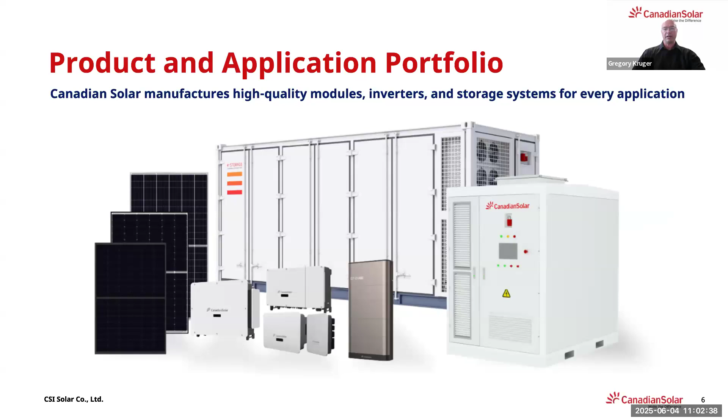Our product and application portfolio — I'm going to discuss some of our modules and then also the power electronics equipment. So we don't only manufacture modules, we also manufacture power electronic equipment for residential, commercial, and utility scale. Being able to offer this to our clients simplifies your procurement as well as any contract signing and credit processes, and it's also easy to coordinate your logistics, working everything with just one company.

Under our product portfolio, we've got the residential products, which is the panels, and then also our EP Cube, which is a 7.6 kilowatt hybrid inverter with 5 kilowatt hour battery bank, which is stackable. Then under our CNI, we've got the CNI panels with our string inverters, and then our Kubank, which is a 100 kilowatt PCS inverter with 247 kilowatt hour battery bank.

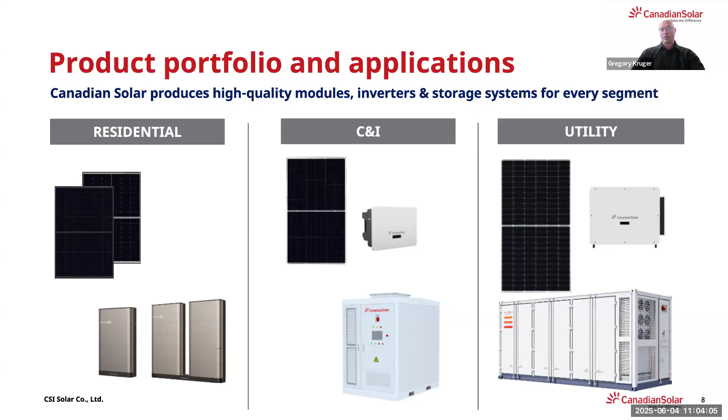So all in one unit — some of the key technical features: it's got active cell balancing, liquid cooling, and fire suppression built in. Then over to the utilities side, we've got utility modules, string inverters, and our SolBank, which is a 5 megawatt hour containerized system in a 20-foot container. For more information on these products, please feel free to contact us and we can discuss it further for any of your project requirements.

So today I'm just going to discuss our modules and the string inverters, as this is something that Nicolas is going to use during the design. Under the modules, we've got residential and commercial modules: the CS6.2-48TD, the 54TM, and the 66TM. This is a range from 440 watt up to 635 watt. All of these modules come with our N-type TOPCon technology.

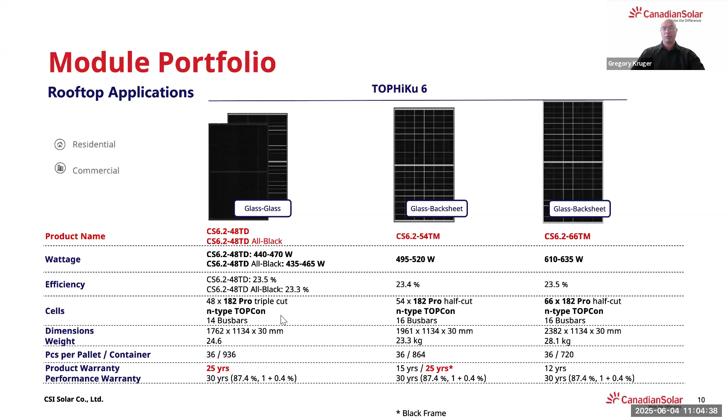Then under our CNI and utility applications, we've got the CS6.2-66TB up to the CS7N TB-AG bifacial module. Again, these are with our N-type TOPCon technology and our glass modules, the solution for your commercial and utility projects. Over to our special modules.

As you can see, the module definition is the same, except here at the end where we've got the H1, HP, and AG options, also from 620 up to 730 watts. So what makes these different is that the H1 panel is for high loads — we've increased the frame size from 30 to 35 millimeters. Under the HP, again the same dimension or thickness on the frame, but the glass is 2.5 millimeter, so that gives you greater hail resistance. And then on the AG module, again the 35 millimeter frame for higher loads.

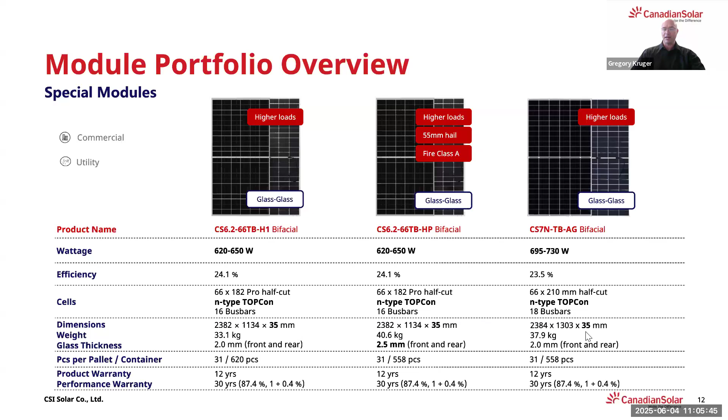So under our inverter solution, we've got a range of string inverters for your small commercial scale up to your large utility scale. These inverters feature MPPTs that have a 32 amp or 40 amp input, and they have a 10-year standard warranty which you can increase to 20 years. The reason we can do that is due to our patented cooling technology, which gives you long-term reliability on the inverters.

So the inverters start off at a 15 kilowatt all the way up to our 350 kilowatt. This range here for your utility scale, you'll see is an 800 volt medium voltage inverter, where the rest are all low voltage, 400 volts.

Something I want to draw to your attention, as mentioned in the previous slide, the 32 and 40 amp options. We've got inverters with 9 MPPTs at 32 amps, so that's 2 strings per MPPT with a maximum of 16 amps per string. If you use panels with a larger current, we've got an option of a 6 MPPT inverter with 40 amps per MPPT, so that's 20 amps per string.

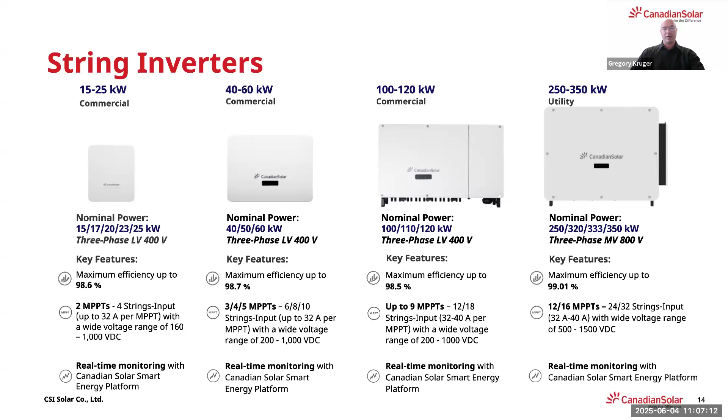For any information you need on these inverters, please feel free to contact us, and also our Canadian Solar technical support. We offer support to customers, installers, and distributors. There are 4 ways of contacting us. We also offer local pre-sales and after-sales support, installation support, and on-site maintenance and support. This way we try to offer our clients the best support on our Canadian products.

So that's everything from my side for now. I'm going to hand you over to Nicolas, who will do a demonstration on the design tool.

Thank you, Greg, for a great introduction. Quickly introduce myself, I'm Nicolas Garcia, technical support engineer for system design here at Canadian Solar. As anticipated by Greg, we are going to do a demonstration of our design tool. I'm just going to share my screen here.

We will focus here today on a C&I project with our modules and our inverters. Our tool is free, everyone can use it, you just have to register. We will share the link.

It's here provided by Insan, and this is the login window. Obviously I already have my credentials, so I will just log in.

You will see now how the tool is structured in 2 parts, maybe. The main part, plant configurator, or if you go here to home, it's basically the main window of the tool, a part of the tool where you can design projects from scratch, including also the physical part, so all the buildings, obstacles, and so on.

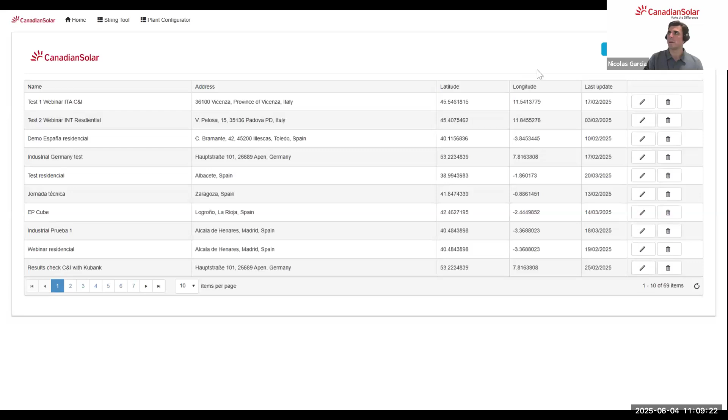As mentioned, I'm going to start here today with the string tool for a C&I project with modules and inverters. To create a project, we go to string tool and click on new, and then we just have to input some basic data. So for example, here, webinar 4th of June will be the name of the project, then the reference as we want, and a short description, which is going to be for me, PV with inverters.

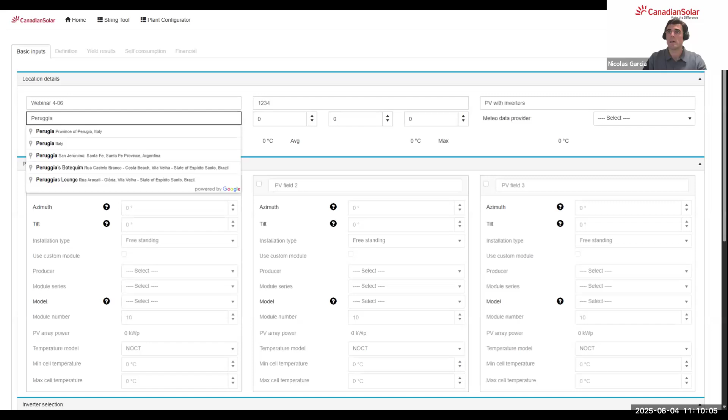Very easily - the important thing here is the address. In this case, I'm just going to input a city. If you have the exact address, it's always better, because then the system is going to load data from Meteonorm or from PVGIS. It's going to input all the relevant information on the radiation, on the temperatures, and so on.

Also important to mention that all data here that is loaded into Insan is verified and certified by the Fraunhofer Institute in Germany, and it's even bankable. So here we've seen how the information has been loaded from the location, temperatures, and so on, and we can move to the next step.

In the next step, we have to define PV fields. In this case, we can define up to 3 PV fields. We just have to input the information here and activate as many as we want. I'm just going to use 2 here, just to show you how it looks like in the next step. But basically what we have to do is include an azimuth here by clicking on the question mark or inputting the number directly in the window.

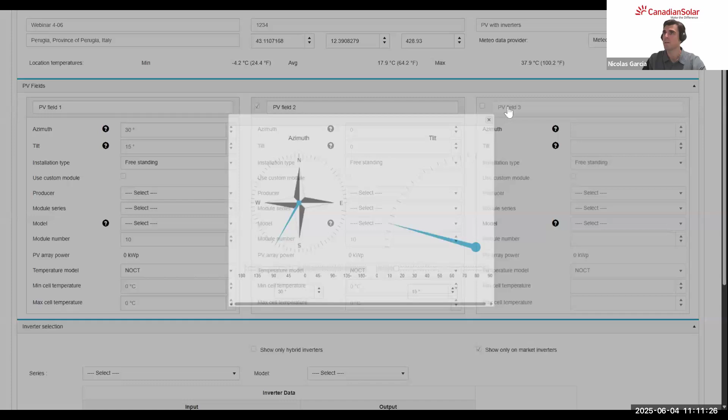Here I'm going to say that it's a south-facing slope, more or less, and then the tilt is going to be almost 15 degrees, which I'll input by hand. Once we have it, we have to select if it's a freestanding installation or roof mounted, and then we can choose the module. If we want to choose a custom module that's not Canadian, we offer this possibility here even by clicking on this box.

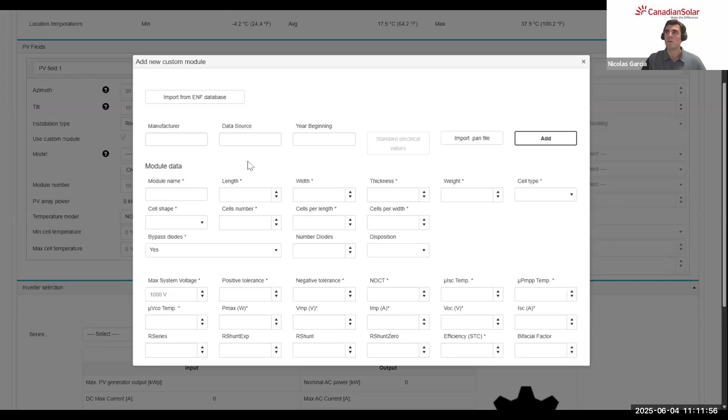To create a new module, we just have to input the data here manually, or select some modules that we have created in the past. We can input also a PAN file directly, or we can look into the ENF database and fill automatically all the fields.

Here we are going to recommend using a Canadian solar module. In this case, for a commercial and industrial project, we are going to use the CS6.2-66TB of 630 watt power class. I'm going to select here the number of modules to get exactly 180 modules for 113.4 kilowatt peak. With this, we have defined the first field.

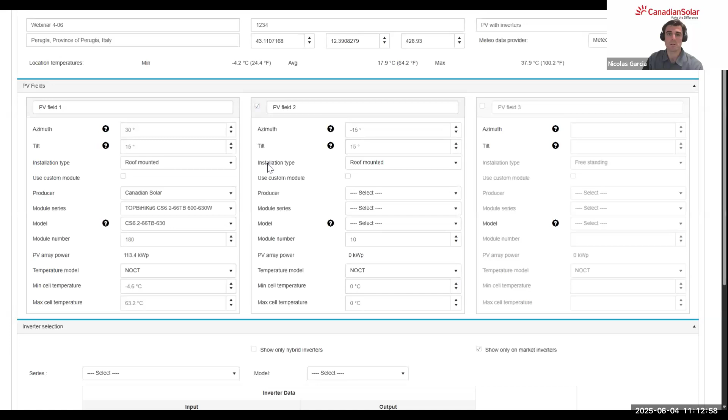Then we have to fill the second one. I'm just going to do something similar here, similar tilt, 15 degrees, just to show you how it looks in the next step. Obviously, the demonstration we are doing here is something invented, not real, but just to show you all the features of the app.

Again, I'm just going to be fast here, selecting the modules, 630 watt, and I'm going to say, maybe 189, just so we can differentiate them. With this, we have defined the PV fields.

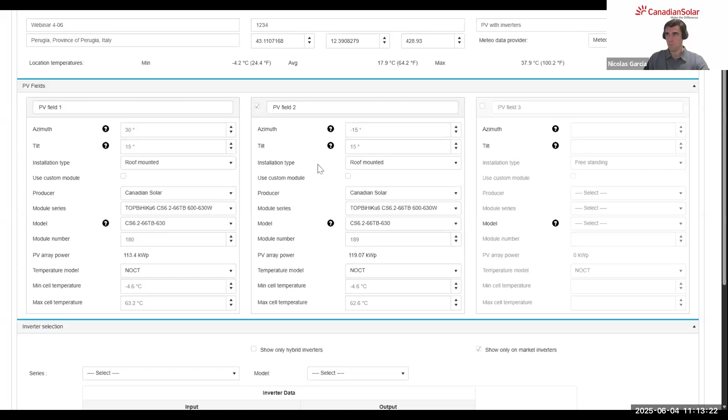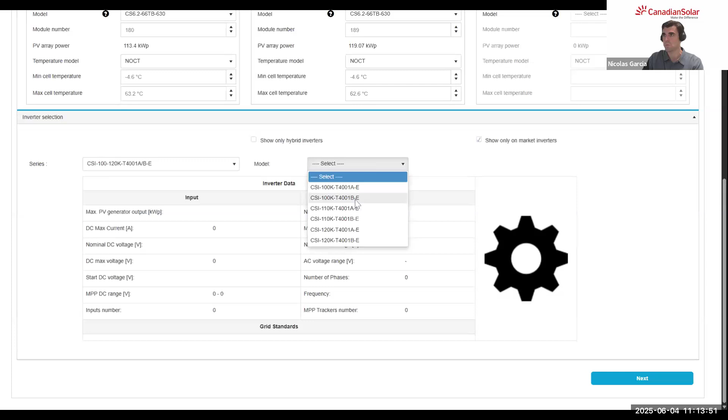We just have to select now the inverter. For this, we go into the inverter series. Here we have already marked a box that shows only the inverters that we have available, and you see how we have all our commercial and industrial inverters. Also the EP Cube, it's not going to be covered in this webinar, but in this case we're going to choose the 100 to 120 kilowatt series, and focus maybe on the 100 kilowatt inverter type B, with 9 MPPTs.

Here we have some basic input data and also some output data that we can use to estimate the one that we have to use. Once we have it, we click on next.

And we move into the inverter configuration. The system will allow us to change the number of inverters here in the beginning. Here we will have 2 inverters with a DC-AC ratio of 1.1 more or less. We can just confirm, and here we will see the layout.

We have here the inverter number 1. I'm clicking here just to hide it. And then we see the inverter number 2. Also, we can hide it.

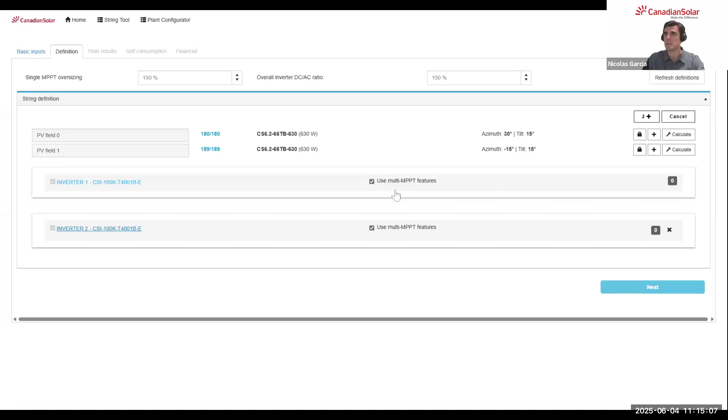Important here is that we assign, well, here we have all the MPPTs. In this case, we have 9 MPPTs, and we have here the PV field that is going to be assigned to this MPPT. In this case, the PV field 0 is going to go into inverter number 1. And if we go to the second inverter, we see how it's already assigned the PV field 1. This is important to balance the strings.

Then on the layout here, we've already defined the PV fields with the number of modules that we have, 180 and 189, the module that we choose, also the azimuth and tilt. Then we have on the inverters all the MPPTs.

Important here to know what this means basically. Here, for each MPPT, we have two entries. So on the rows, we have entry number 1 and entry number 2. And then on the columns, we have the number of modules that are going to be inputted into each input, so the number of modules per string.

What this tells us here is that the minimum modules per string that has been calculated for this inverter and these modules is going to be 6. So if I click here on the 6, it means that we are just inputting one string of 6 modules into the first entry of the MPPT. If I click on the 10, then it's going to be one string of 10, 14, and so on.

If we are going to use both entries of the MPPT, then we have to go into the second row and click on these cells. For example, here, when we see 12, it means that we are creating 2 strings of 6 modules, inputting 6 on the first entry and 6 on the second entry. Same, if we click 10, then we have 2 strings of 10, 20 total.

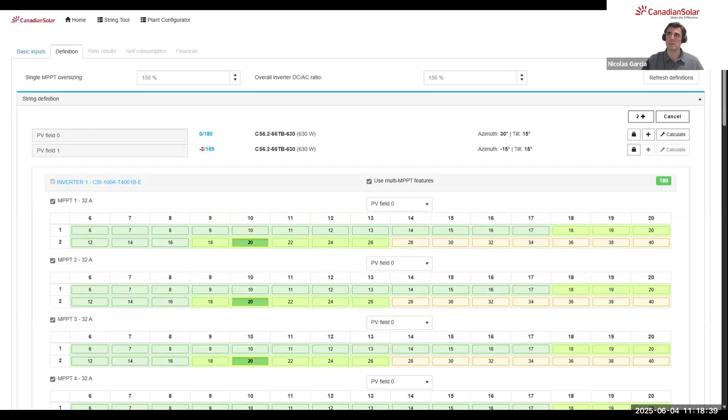And there we go. Here the system will tell us if we have assigned all the modules or not. So for example, this -3 seems that we have assigned 3 modules more than we are supposed to. So we just have to assign this correctly, or just click calculate again, and the system will do it for us automatically.

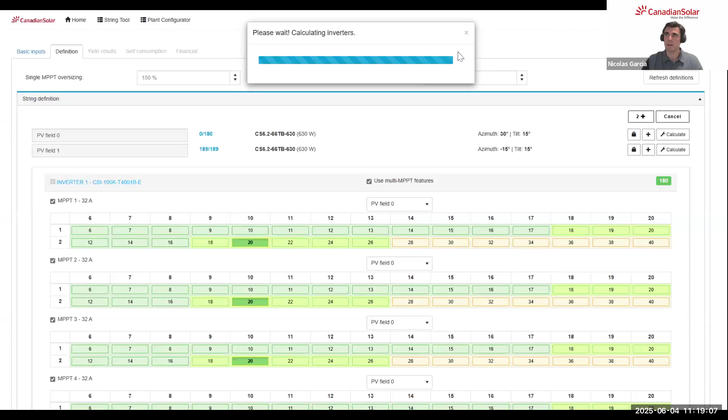Again, we generally recommend doing it by hand because of the instructions of the inverter. Yeah, exactly, now we've got one module left. I'll just do 19 here, very randomly, until we have 0 out of 189 to assign.

Very quickly, I'll just go to the next step.

Here again, the system will load the data that we are inputting together with the data that it has from Meteonorm for irradiation, also looking into the physical landscape that we have on the location that we selected, and it will load it kind of in layers in order to get an output that is reliable and that we can then export into the final report that we can share with anyone, with the client, or also just for us to do our calculations. Also to mention that anytime you need any kind of support, or if you want anything tailored, just please reach out to us.

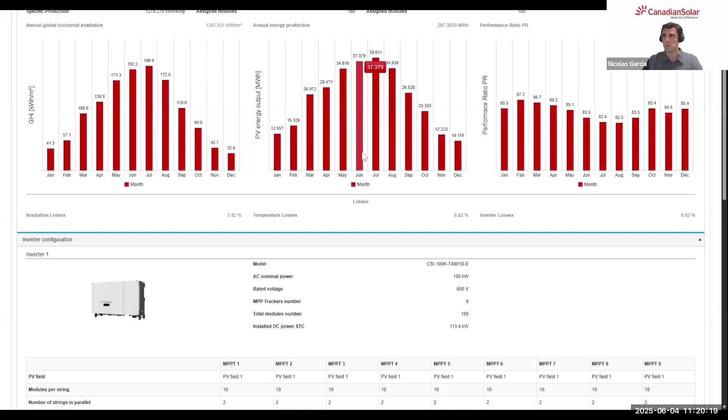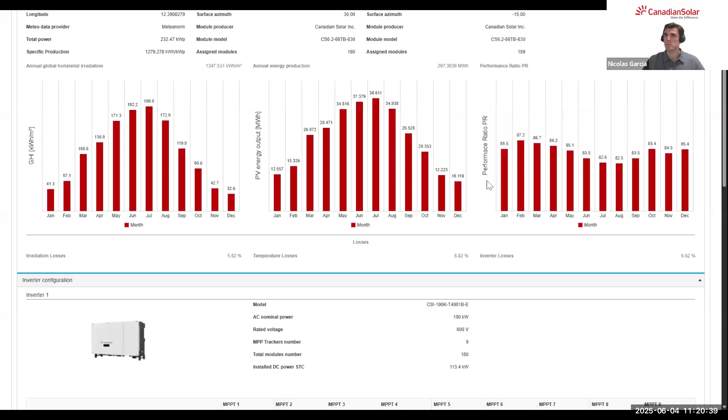We can do it together. Also, so here in the yield results, the next step is showing the basic results of the simulation, which includes the definition of the fields, kind of an estimation of the PV energy output, the performance ratio, and so on, together with the configurations of the inverters, where it shows the strings that we have inputted per MPPT here in the columns, and all relevant values of power, voltages, and currents.

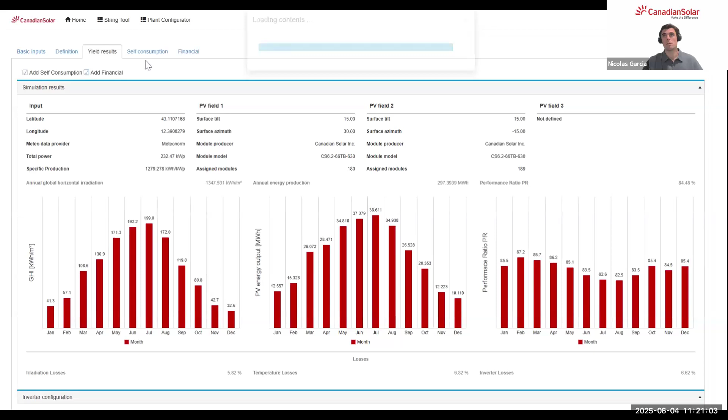If we want, we can already export this by clicking here on the top right into the print button, or we can add the self-consumption model, for example, if it's an industry, and also the financial study for the client.

In the self-consumption, what we can do here is input the consumption of the client, and then the system is going to use the algorithm to divide in a smart way the energy that's going to be produced into the self-consumption of the client or the storage system. If we include it, we will have a dedicated webinar, as mentioned, later on, and also it will be injected into the grid. In this case, first we have to define the consumption profile.

For residential installations, the system can actually calculate it with some input data. For commercial and industrial, we obviously recommend uploading the load hourly profile.

To do this, we just have to load a CSV file with one column with 8,760 values. I have here several loads. In this case, I'm just going to upload this profile with 150 megawatt hours per year.

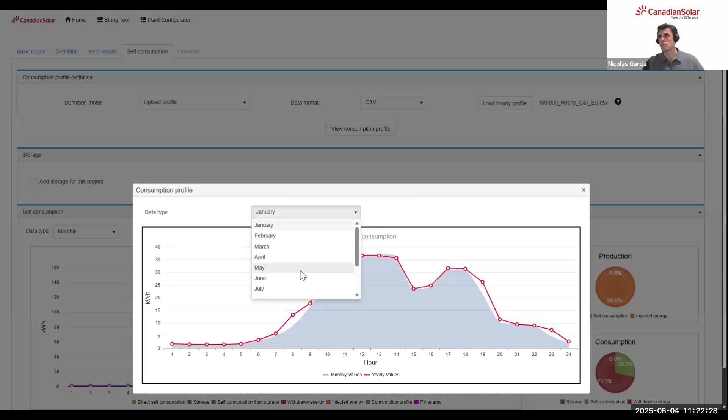We can click here and view the consumption profile, and you can see here how the consumption is divided by hour and by month. In January it's going to be different from March, and so on. Once we upload everything, the system will always tell us to reload the graph so we can visualize the results.

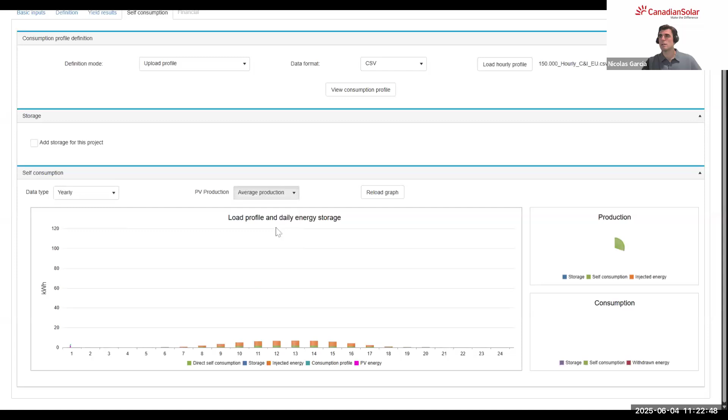So, for example, here we can see it on a monthly basis, on a yearly basis. Normally, I would recommend going to the yearly data type and seeing the average production. So this is showing us kind of an average day during the whole year, not per month, but the whole year of the production that we have here in this pink color.

Also the consumption, so the load curve that we have here in this light blue, and then where the energy is going. We can see also this on the right, where the production is going to self-consumption, 30% of it, and then to be injected into the grid, almost 70% of it.

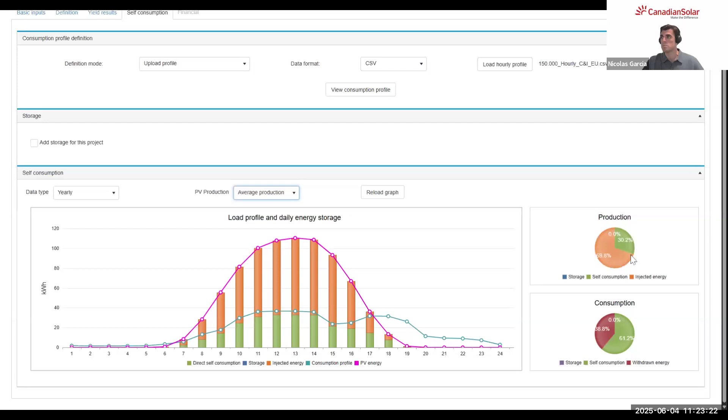If we want to add storage, we will see this later on, but just to give you a snapshot of it, we have to click on this box. And then you will see a recommended batteries capacity. You can choose our solution. In this case, it will be Canadian Solar AC coupled KuBank, and then we'll have to reload the graph.

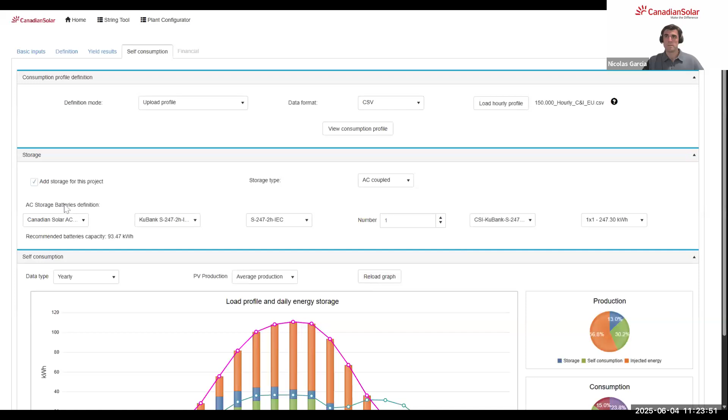This will tell us that the excess will go into the KuBank and so on. I'm not going to deep dive into this today, just going to focus on modules and inverters.

Once we have this, we just have to save, and we can move on to the financial study for the end customer to see how the business case looks. This is loading the context of the inputs we've provided, and when it's ready, we can move on to the financial part.

Also worth mentioning, this is a web-based application, so it's always better to have a good connection to work with it. We see here the financial calculation very quickly. First we've got the option to change the years of economical analysis.

In this case, it's 20. We can move up and down, but I'm just going to leave it like this. We can also change the currency; I'm just going to leave it in euros.

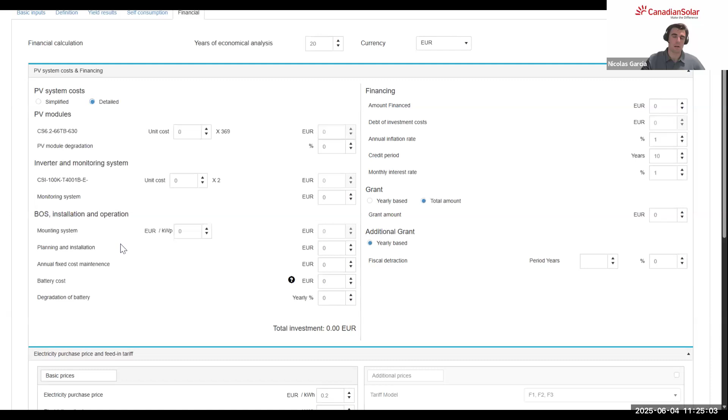First things we have to input are the costs. We can input these in a detailed way, including the cost per product, so modules and inverters, and then additional costs like installation and so on. But generally I would recommend using a total cost of the system in euros per kilowatt peak.

I'm just going to invent something here. Please don't take this as a reference, just so you can see how the system works.

The annual power degradation of the PV module we can see in the datasheet. Normally it's filled automatically, so in this case it's going to be 0.5% per year. And then the battery cost in this case does not apply.

So we will see down here the total investment needed for this project. Then, if the client wants to finance part of the system with credit, or if there are any grants available in the country or region you're working in, you can input the amount here.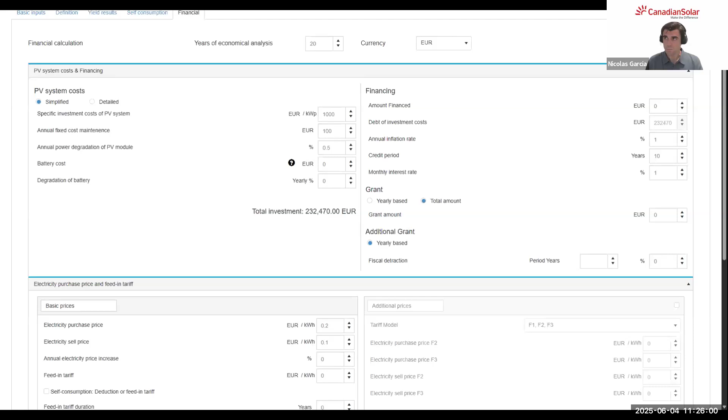It can be a total amount, so for example 10% of the project, or a fiscal detraction of an X% for a number of years. I'm just going to leave it blank, and then the next part will be the last one.

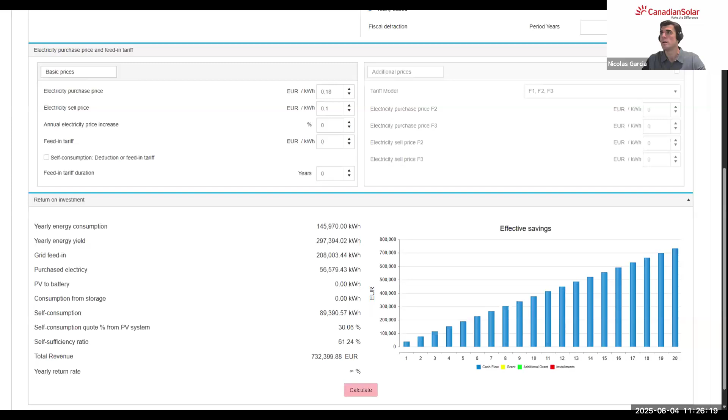The electricity purchase and sell price. It's set here automatically that we are purchasing electricity at 20 cents. I'm just going to put this a little bit down, and then I will modify it later on. Again, not for any reference, but just to show how it works.

Once we have the prices input and all the costs here, we can click below and calculate. We'll see how the system gives us a summary: yearly energy consumption, energy yield, also where the energy goes, the revenue we can expect, the yearly return rate, and so on.

And here on the right, it gives us a kind of cash flow diagram, which tells us that we will be recovering our investment between year 6 and 7.

Obviously, it's going to do something here again: increase the purchase price and also increase the sale price to 14, for example. If we calculate, this will change. We can see how it looks.

I play with it, as you see here. In this case, if we increase the prices, then we will recover the investment a bit earlier. Again, this is not for reference, but anyway we have shown how the string tool works.

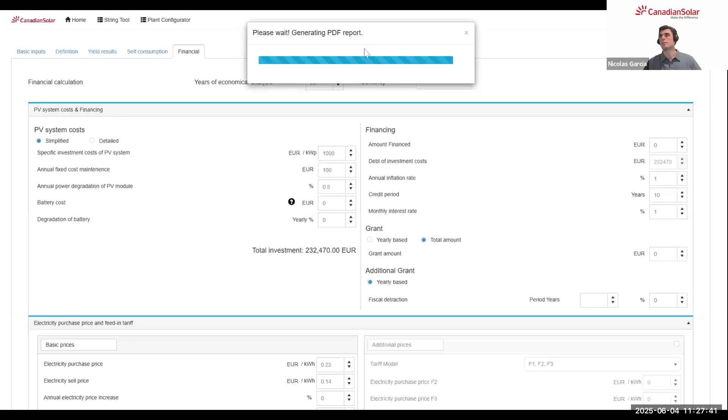This we can then export by clicking the print button here. It will pop up in a different window, which I will share now. Basically, the system will generate a PDF report of what we just did, including how the system is configured based on our input, the yield results, the self-consumption, all the data we've inputted with the consumption, and finally the financial study.

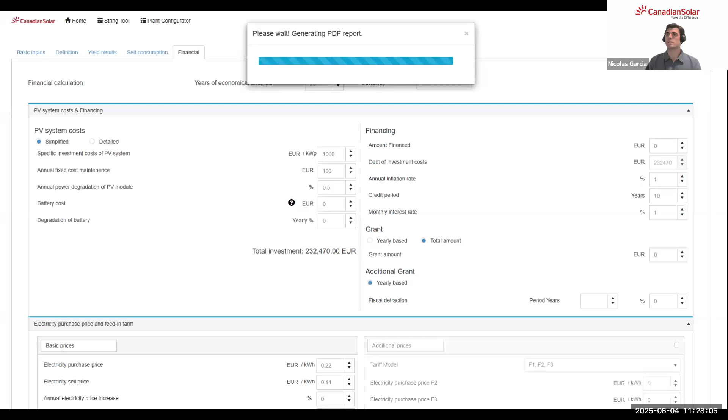Again, this has popped up in a different window. Oh, just give me one second please. And here we'll search this tab. Here it is, the report.

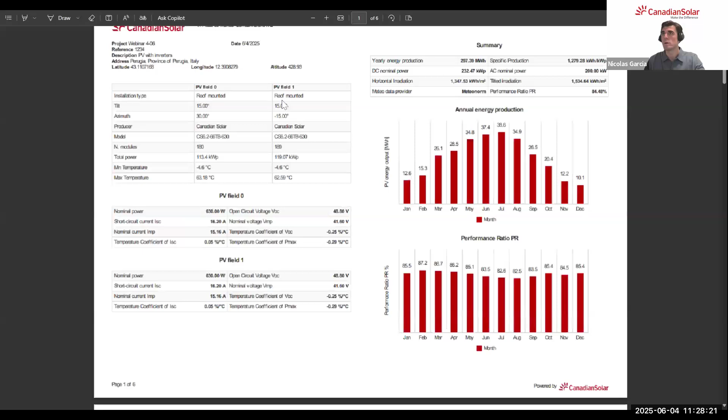Again, the name we gave to the project, webinar reference, and so on with date. We have also the inverter configuration with all the relevant values of the MPPTs, the self-consumption model, and finally the financial case.

So with this, the demonstration of the first part of the tool is finalized. Please reach out with any questions. We are always happy to have a talk and speak about any kind of design or configuration you're working on, and also to support with it.

So now moving on to the second part of the tool, we'll have the plant configurator, which requires a bit more explanation. I will try to be synthetic here, but basically, again, same process.

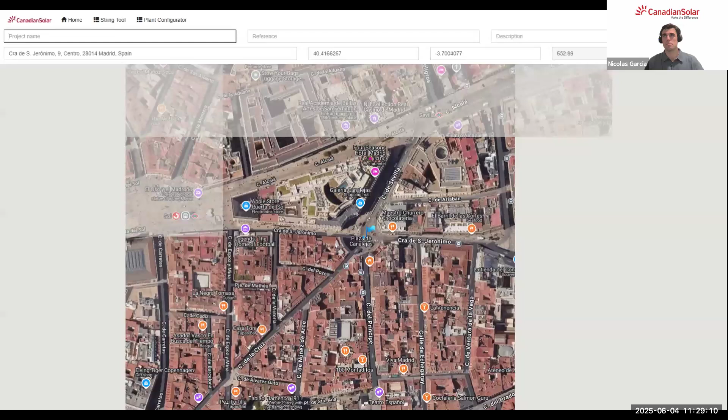You have to go into new. In this case, I'm going to input a project name: webinar reference 1, 2, 3, 4, PV plus inverters.

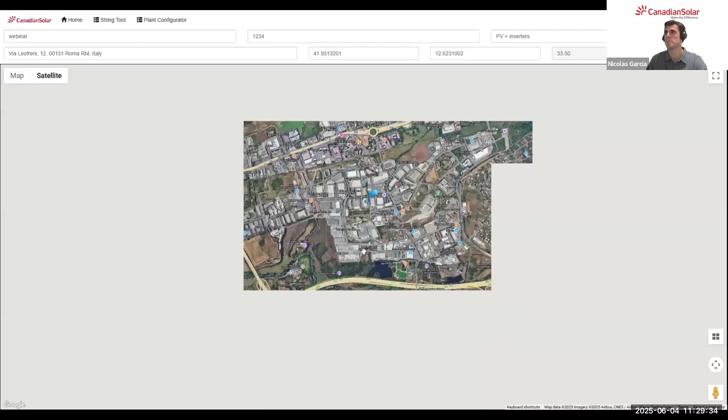Here it's important to include the address. I have a demo here. We can select it by inputting the address or just moving on the map. An important thing is that we have to place this little blue flag in the center of the building that we want to work on.

We can also, if we want, not show the labels. We can change the view and so on as in a normal Google Maps application. We can move the flag by clicking on it and dragging it, or we can double click and place it. We adjust the zoom, which is important to have the full picture of the place we want to work on, and then we click on create.

Here we will get different menus. I'll try to be fast, not to show everything the tool offers, so you have it on the recording as well. Again, if you have any doubts, please come back to us at any time.

First thing here is the view, shown in the bottom part. We have the light showing. Now we are in a mode that shows us the hours of the day. On the 21st of June, we can change this bar and see the hours of the day. We can also change the day and so on during the year.

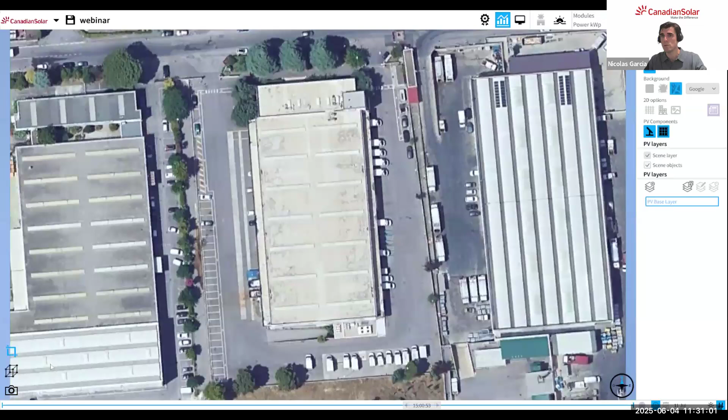First thing we have to do is work on the first menu, which is the terrain. Normally we just go to the sketcher, this polygon here, and we can draw the shape of the building in different ways. We can just draw a kind of polygon by clicking on the edges of the building we are working on. This is generally very useful when working with irregular shapes and so on.

Also, please note, when we see this black cross on top of the edges, it means we are working on 90 degree angles. If we want to keep these 90 degrees, we just have to press Alt on the keyboard and then drag the cursor. Here we will have the shape. In this case, I'm going to delete it by just clicking delete on the keyboard.

Click back on the map and then use a predefined shape, since this one is pretty regular. I already know the measurements of this building, so I'm just going to input the measure. It's going to be 38 meters this way, and this one is going to be 75.

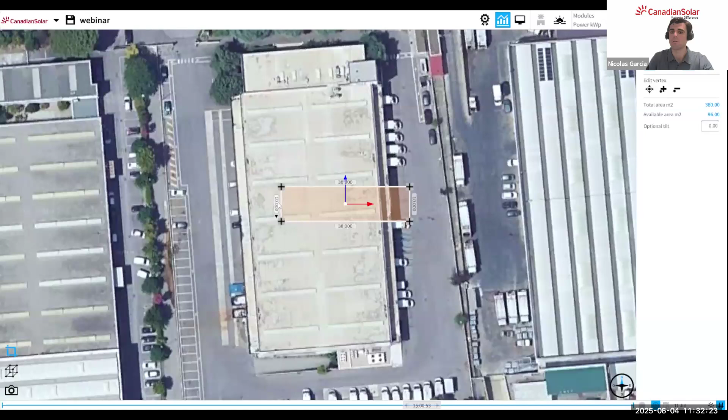We see now that the area has moved from where we wanted. So what we can do is take this blue white dot and drag it. We can also choose the axis and drag using the axis, and we can choose different parts of the polygon so we can adjust the different sides or vertices.

This one, I'm going to choose this one below, so we can go to the right and rotate it and place it more or less where the building is. If we want to go out of the menu of the shape, we just click on the map, and then if we want to go back, we just click on the shape.

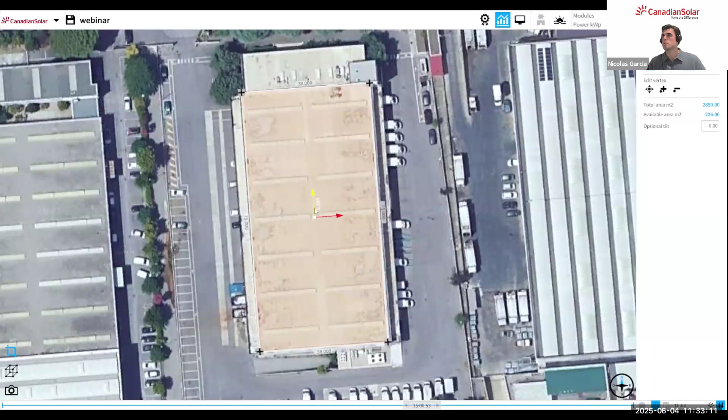Once we have the shape, we just need to create the building. For this, we go into this next step. In this case, it's going to be a flat building. I'm just going to adjust the height to 8 meters, for example, and then click on create.

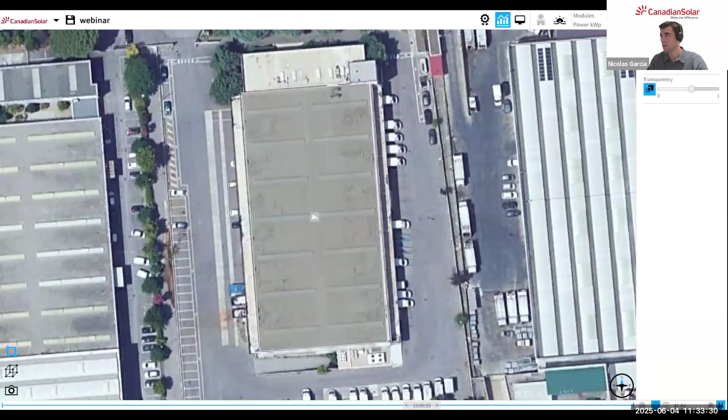Then, when we have the building, we can use the transparency so we can see the obstacles, and the obstacles is going to be the next menu. As we see here, I'm just going to place some openings, which are these ones, on top of these ones that we see here.

I'm going to adjust a little bit the shape. On the menu of the shape, we can duplicate it, and then we can also scale it. For example, here I can scale more or less a little bit the shape. If we want to adjust it again, exit the menu and then come back to this translate button.

Once we have it placed on top of the building, we can also duplicate it. The important thing when duplicating is that the red axis is always the horizontal axis, the X, and the blue one is the Y. To duplicate it, we choose this option here, duplicate.

On the X direction, we just have 2 openings, and the distance between the reference dot here and the reference dot where it needs to go is going to be 18.5 meters. In the Y direction, we've got 7, and the distance is going to be 10.25.

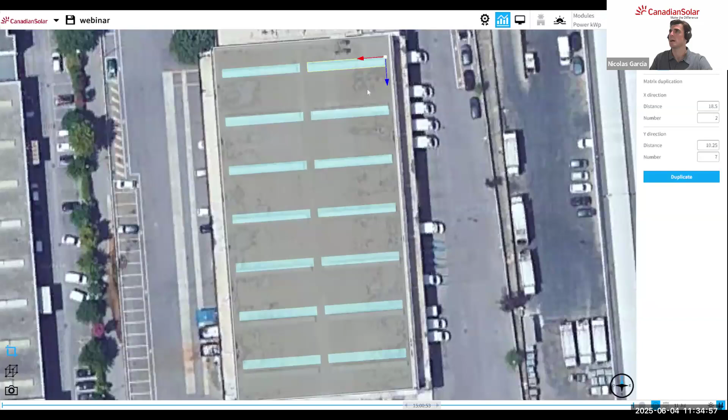So once we have this, we just click on duplicate, and we see how this has been extended to the whole building. You can now click again on the transparency, maybe go into the 3D view.

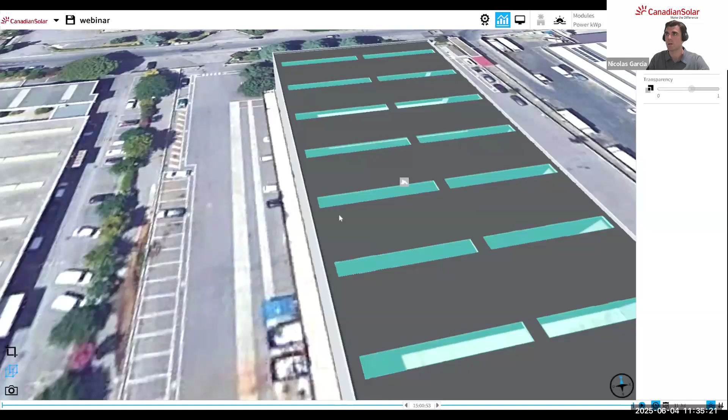To zoom in and zoom out, we just use the wheel of the mouse. If we want to rotate a little bit, we press the right button and move the mouse around. We can also press the wheel of the mouse as a normal button and move around with the mouse to do a translation.

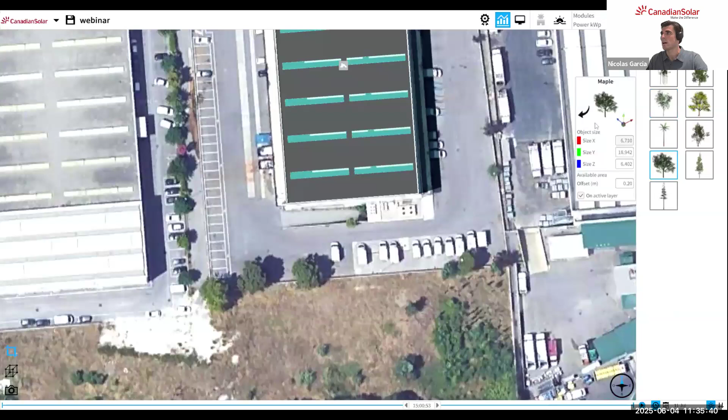Once we have this, we can also add additional obstacles. We can add, for example, in this case, some trees below that might cause some shading at some point. I'm just going to use a maple here, as we're Canadian, and put them on top, just to see if there is any kind of shadowing. Probably not, but just to show it.

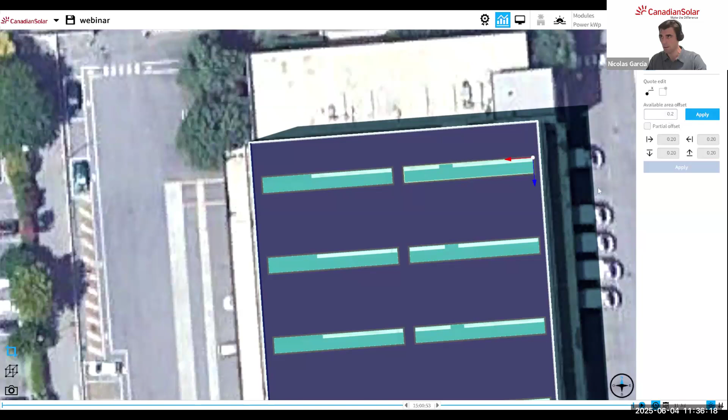Once we're happy with the obstacles, we can also provide some offset to them. The default offset is 20 centimeters. If we apply here, we see how there is an offset in every obstacle where modules are not going to be placed, obviously. We can also increase this if we want, to 0.5 and so on. This works for any kind of object that we put on the building.

We can measure things with this Sketcher tool. In this case, we can measure, for example, the 38 meters of the building. We can also select different objects here with the multi-selection, so in this case I can select these 4 openings. I could delete them if needed or modify them. I'm just going to disable it, and then go to the prototype.

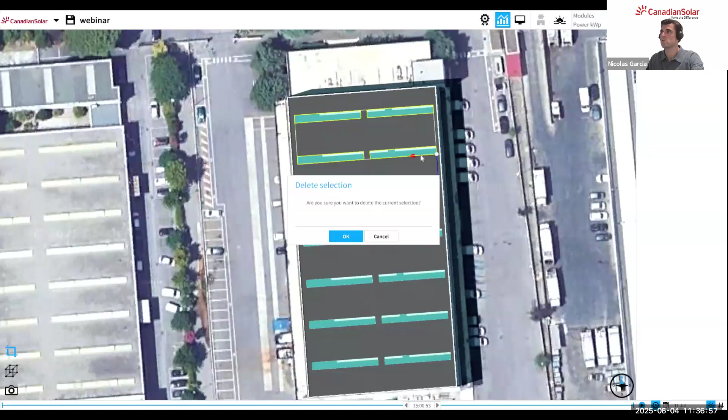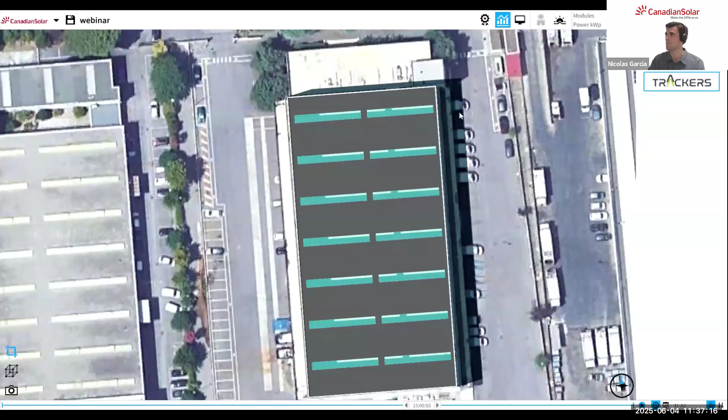For the prototype, we can create different kinds of structures. Here we've got the tracker, which is a ground mounted single, double, or different axis tracker for ground mounted installations, for whoever wants to check them. Normally we click on custom structures for roof mounted, and we see different kinds of roof mounted structure, including the normal ground mounted fixed structure without any tracker.

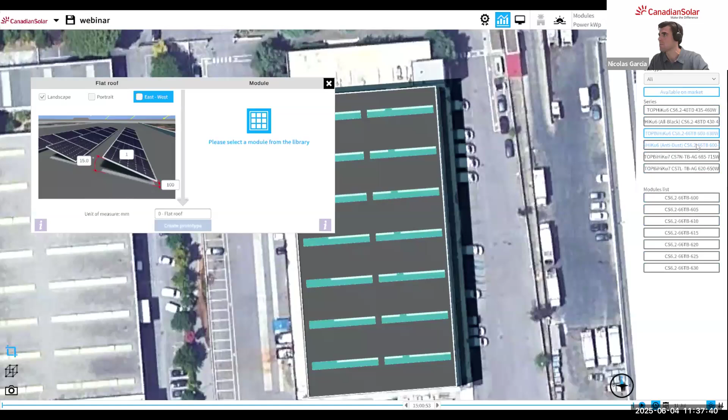In this case, we are going to use a flat roof installation in a landscape way with 15 degrees, and select the same module as before, the CS6.2-66TB, 630 watts. I'm going to leave the name of the prototype as flat roof. We see this is landscape, so it's horizontal, placed as reference, and when we create it, it goes onto the next menu.

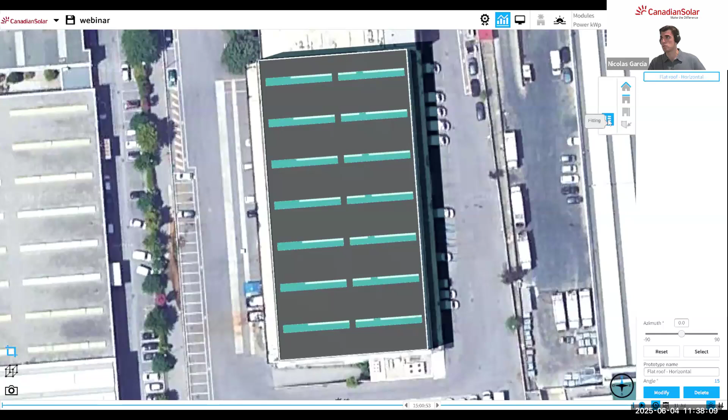Here we can have different kinds of prototypes if we want to check different kinds of adjustments. I'm just going to use one in this case to do the fitting. Just click on this blue arrow, and then click on the field that we have. We can select how to place it, whether to center it, adjust it to the left, to the right, and so on.

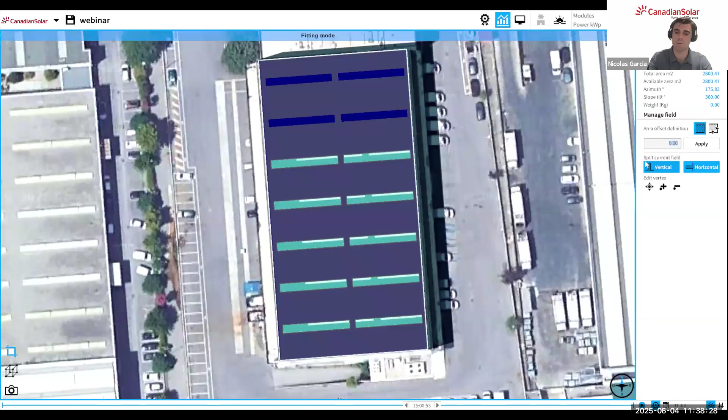We can also give offsets to the different sides. We can give an offset here of, for example, 0.3 for all sides of the building, and then we see how the area is a little bit reduced.

Then we go again onto the fitting mode, and we can click on calculate. Here we have seen, obviously, we selected the openings previously, so they are not included, and we see how the modules are placed facing south, in this case because we are in the northern hemisphere in Europe.

If we want to adjust it to one edge, we just click here on edge, and then choose the edge where the modules are going to be placed. As we see, the system recommends us to place it like this. I'm going to use this one. So when we're sure about the layout, we click on place.

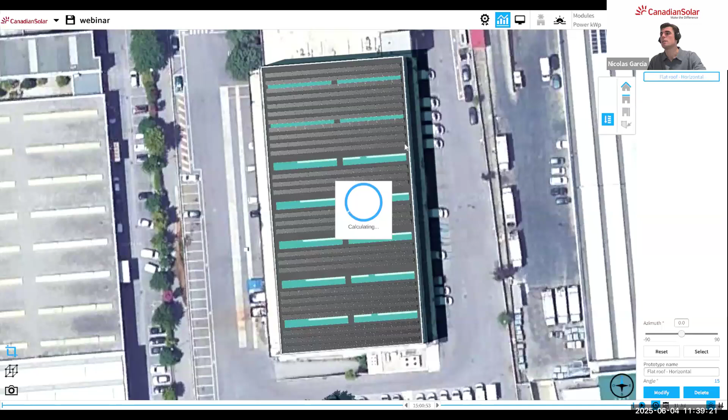As we see, because we selected them before with a multi-selection, these objects have not been taken into account. But I'm going to quickly show you now how to edit this, how to delete some rows if needed, since obviously these rows are not realistic because they would be on top of the opening. So we can just select them by clicking on it and delete it.

As usual, we can work in 2 dimensions or in 3 dimensions if we prefer, again selecting these 2 rows.

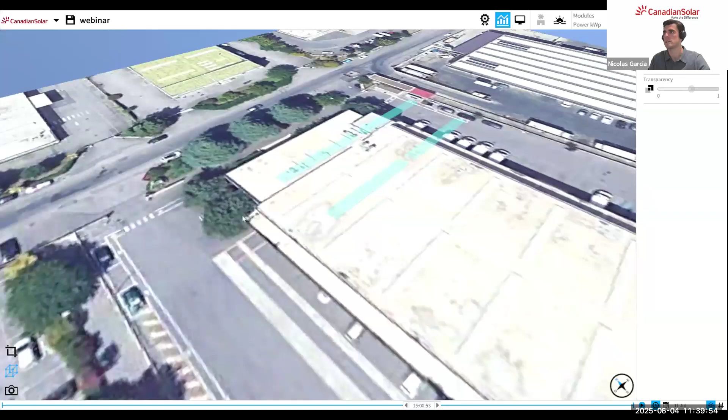This one, deleting, and I think this is the last. Sorry, I deleted the whole building, which is pretty unfortunate. It's something that happens. So the next step in this case will be to create it again. I'm just going to do it very quickly.

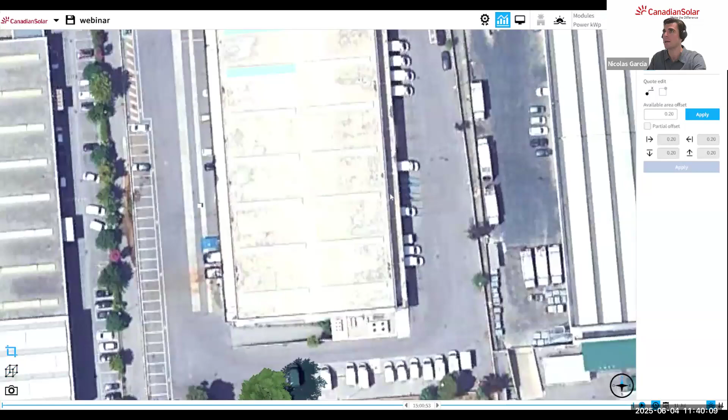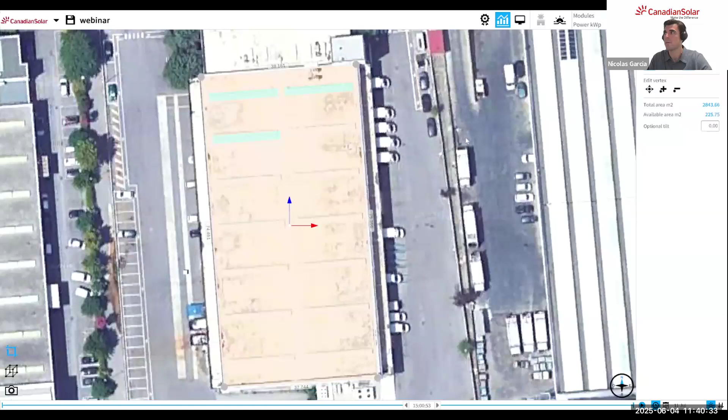By using this, directly the polygon. It's important when we click on anything on the shape on the map, it's going to open the menu of this. So if we then delete it, it's going to be deleting the whole object that we selected. So I'm going to quickly duplicate again this obstacle.

Then we had 18.5 here and 2, and then we have here 10.25 and 7 objects. Duplicate.

It's not doing it because it's not placed on the building. Important again: so when we have an object, we have to place it directly on top of the building that we had, as we see here. Transparency.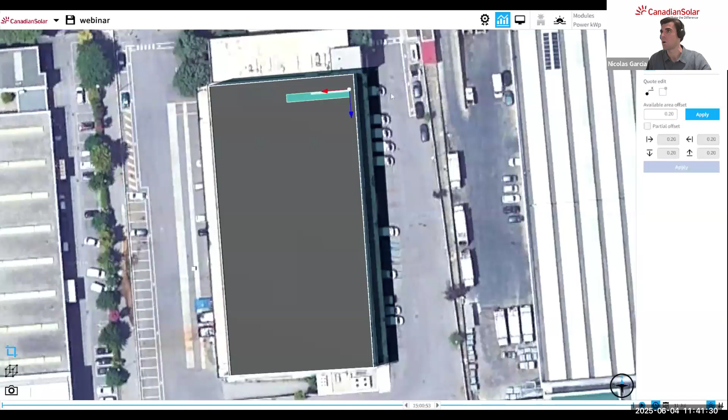We see the objects there, but they're not placed. They were placed in the previous building, which means that they're not going to work on the actual building that we have now. So once we have this, we see this opening has been fitted into the building that we have created it on.

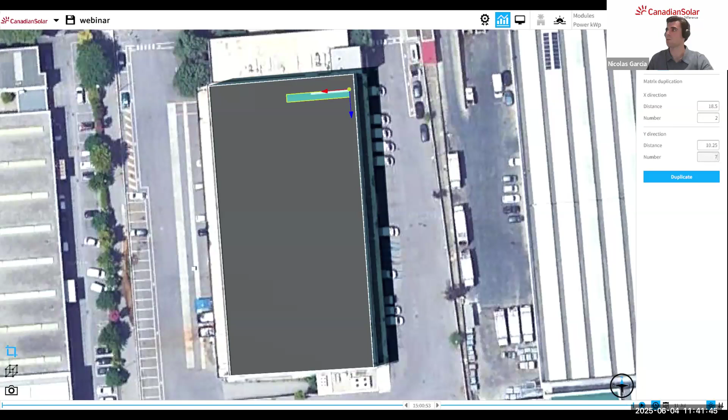So again, 18.5 meters and 2 objects, and then 10.25 meters and 7 objects. Duplicate, and now we see how they're placed in the building that we have created. We have the prototype already created, so we're going to place it again, calculate it. It's already automatically taking into account, obviously, now all the objects. We're going to place them.

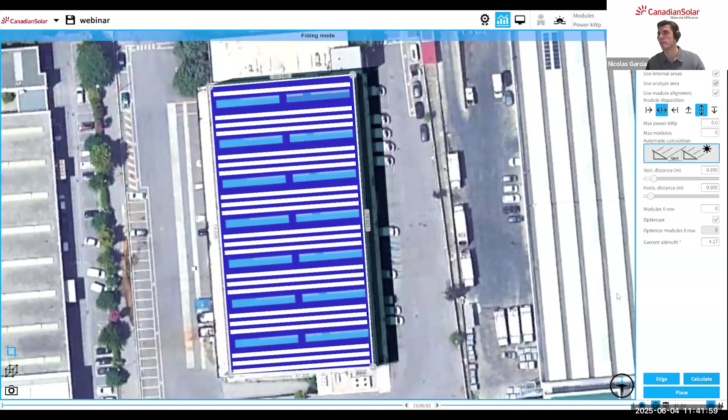We've got the tree here, so we can already move into the next step, which is going to be analyzing the shading. We can analyze it by clicking on this sun here on top. Once we are sure of the installation, here we've got on the top right the number of modules and the total power, which is going to be 207.9 kilowatt peak.

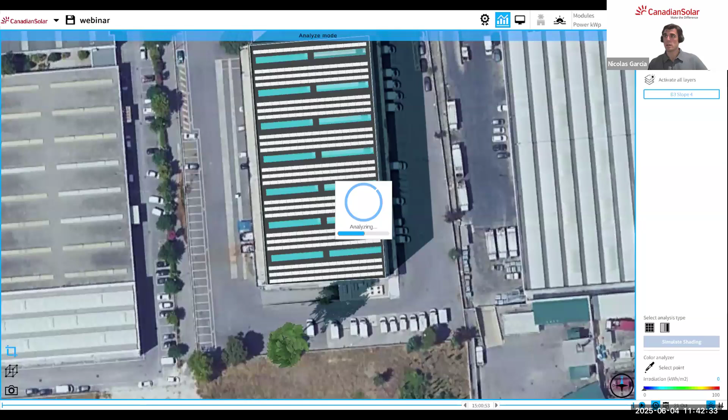And then when we go on to the next step, we can already simulate the shading. In this case, most likely we won't have much shading by this tree. The system will show us here below. And as we see, the losses are minimum, and all the modules are operating more or less at 99%. So no losses in terms of shading.

We close this window, and then we can move on to the inverter configuration. To do the inverter configuration, we just have to click on the slope, click on string design, select the inverter that we have, as we see here. In this case, I'm going to use the 100 kilowatt again, type B, so 9 MPPTs. And we're going to click on calculate.

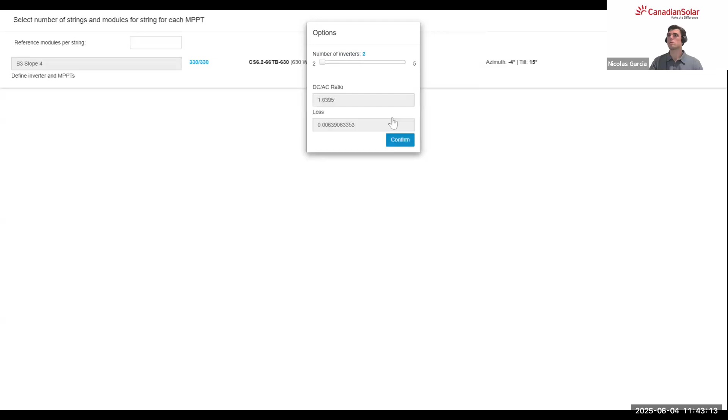The system will then, again, make us choose the number of inverters. I'm going to choose 2. Same as explained before, the thing that we have here is that we can select the number of reference modules per string. So if we click here into 10, for example, if we click now calculate automatically, the system is going to try to adjust the string length to 10. Same if we want to click to 12, calculate automatically, then it's going to be more or less a bit more balanced. I'm just going to move with this.

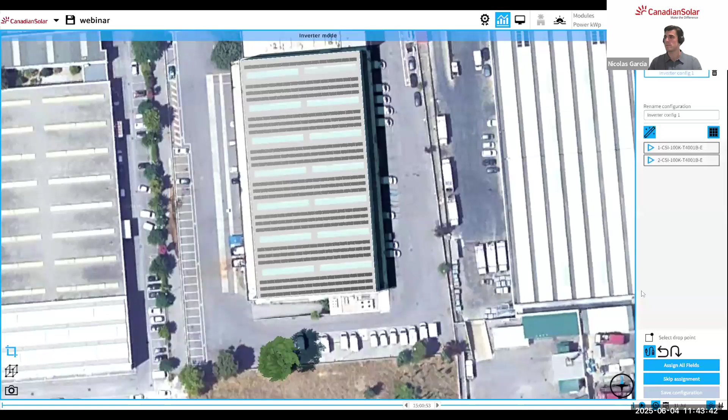So we have to do double click on apply to all fields on top, and then we have to select here assign to all fields below. This shows us the smart kind of string calculation that the system has done in order to minimize the cabling, and then it will show us also here in different colors the string the system has done. And also, if we click here on select drop point, we see how the cables are going to go down to the inverters in this point.

We can move also this point if we want to place the inverters in a different way. So we can calculate the minimum number or the minimum length of cable needed. Once we are sure about it, we click on Save Configuration.

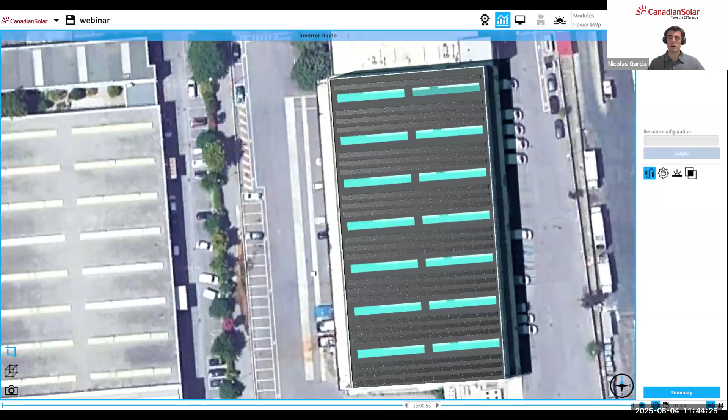And then we can move on to the next step, which is the summary. In the summary, we can click on Configuration, export different drawings. We can have different configurations if we want to compare it, and then export documentation.

This is going to bring us to a different window, very similar to the one we saw with the string tool, but a bit more complex. The reports are going to include more information, more graphs than previously, because the system has more information to work with. I'm not going to go into the details, being conscious of time, but basically it's the same.

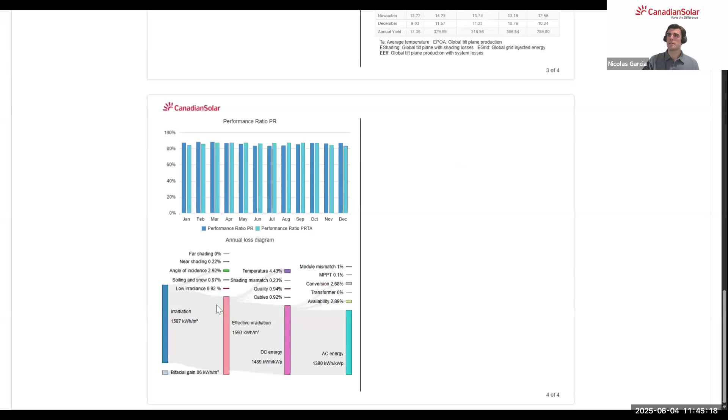The yield - I'll show you the report the system does on system yield, which is a bit more complex than before, including pictures and so on. Then also the losses, different kinds of information that are more complete. Technical drawings shows the layout of the building we created, electrical design, the distribution of the modules, and a single line diagram of the system.

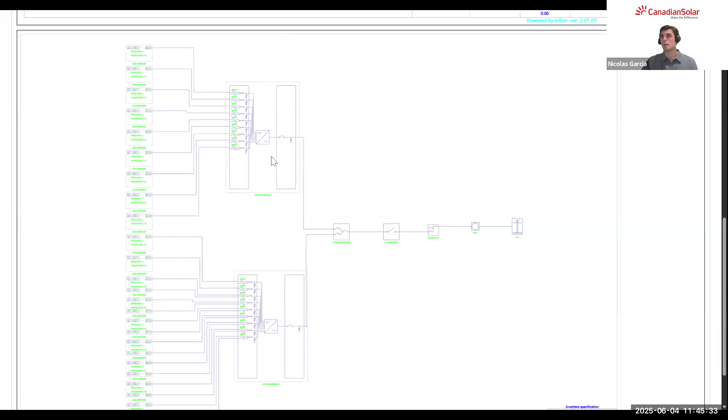Very simple. Then we can also activate self-consumption, financial, and so on. The additional thing the Plant Configurator has is that it can create for us a bill of materials, which includes everything, including the cable we've used for the system, and we can even input this into a commercial offer.

When the bill of materials is checked and saved, we can create a commercial offer, which can then be saved and exported. I'm not going to fill anything, just to show you how it looks, but this will create a PDF form we can use as a basis for an offer. Again, it's created in a different window that I'm going to share now.

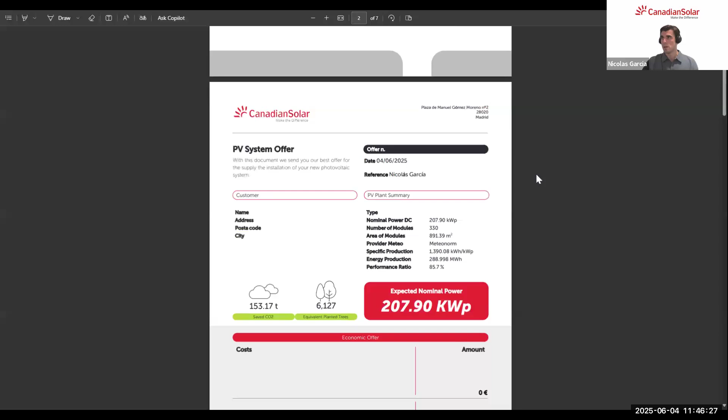There we go. And it looks a bit like this, with basic information, a bit more graphic, and more descriptive for a customer whose main activity is probably not energy, but something different.

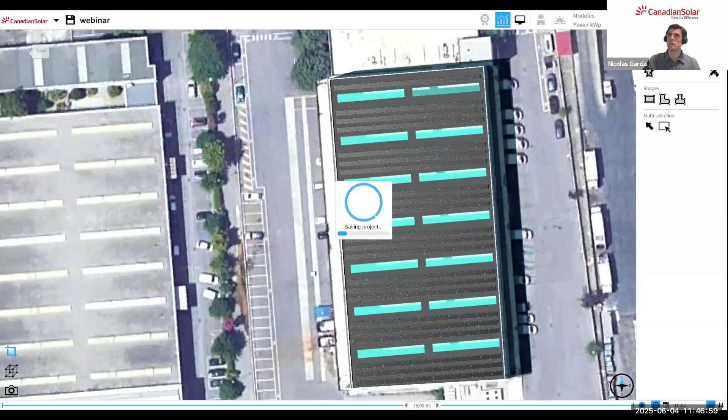Last thing is that we can share these projects with our colleagues, or you can also share it with us by exiting here. Additionally, you can download everything you created here on Excel by clicking this X on top right. And you can also save the project, then exit, and share it with us or some colleagues of yours by opening this manager here, or directly clicking share on the top right.

I'm just going to share it here with Greg. Here there is Greg, Gregory Kruger, and then he will be able to see it from his account. And we also get notified by email.

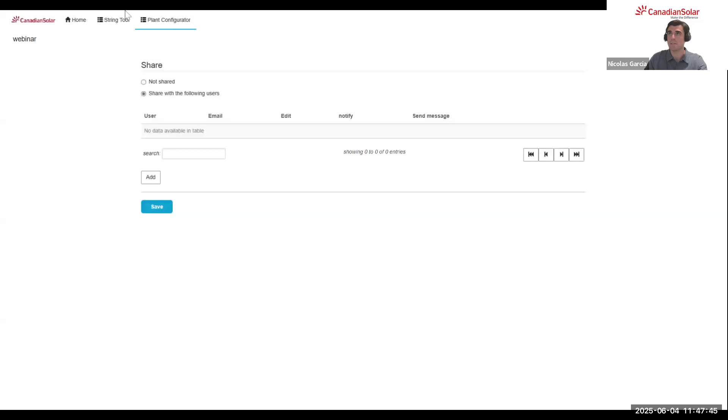So that's basically it. I've sped up a little bit in the end, but I have seen some questions on the chat. I don't know, Greg, if we have some time to reply to some of them.